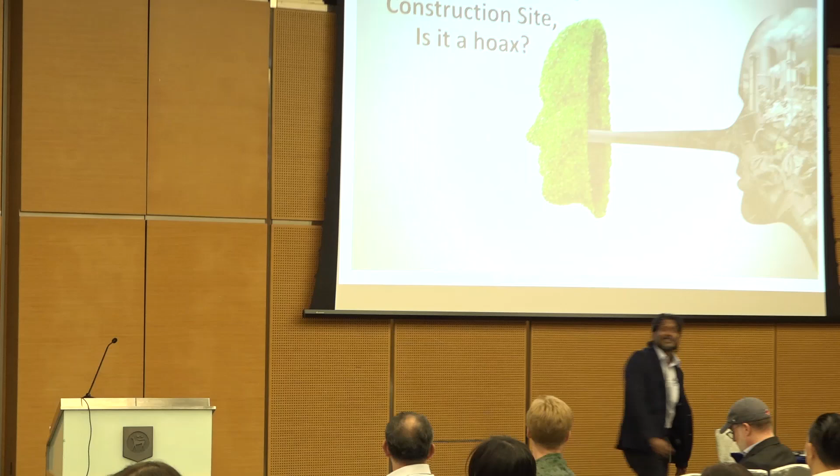Hang on, before that I need to have my clicker. What is the impact from the construction industry? Because when you understand the impact from the construction industry, then you will understand what kind of practices we can mitigate or do. I'm just going to run the whole thing, it's easier.

These are the impacts, and these slides I use whenever we do a presentation at Green RE when talking about sustainable construction. Why is there this impact? I want you to know - it's like consumption of natural resources. Many of you are from the construction industry, I believe, or property development. Regardless of that, even this building that you are here in, we are using natural resources. Doesn't matter, wood, metal, aggregates, whatever - we are all using it to build the space that we are occupying. Yes or no? You may not think so, but this is what we feel.

Next is environmental pollution. When we talk about environmental pollution, the construction industry is polluting. Terrible, right? We pollute the air, pollute the land, noise pollution, sound pollution, whatever you call it, all that we are doing. Thirdly is the impact of material extraction.

The effect on the landform, the effect on the landscape when you extract this material. Imagine that you are extracting aggregates from a mountain. Maybe probably that area was occupied by the Aborigines and Orang Asli. That's it, you've changed the landform. You may even change the ecology, the biodiversity of it.

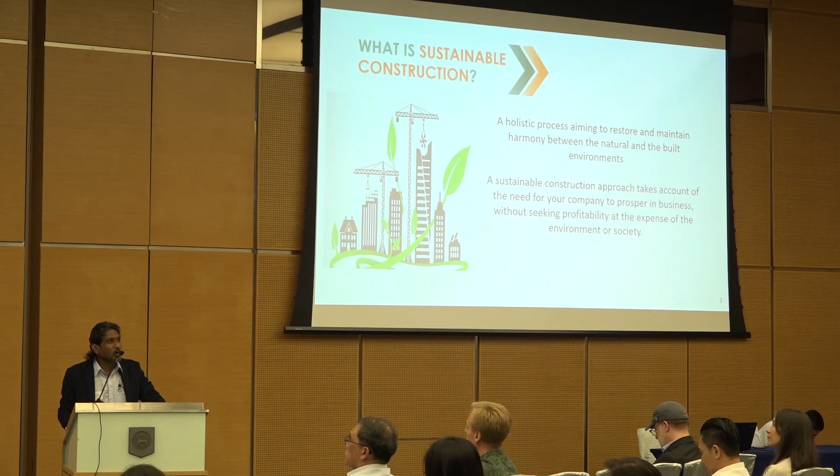But understanding impact, when you know your risk, when you know your impact, you know something's not right, what can we do? Hence comes sustainable construction. Sustainable construction, simply put, the primary goal is to understand what that impact is and how we're going to mitigate it, and to understand that the decisions we're making today have a long-term and short-term impact.

But whenever sustainability is mentioned, it cannot escape looking into three fundamental pillars. A lot of the time people look into just one pillar, but understanding the integration, the cohesiveness of these three pillars, must be made. So in the construction industry, we look into environmental, economical, and social impact. There are many things we can do to get it done.

I just touched on environmental - I spoke about pollution. What can we do? We can do so many things to mitigate it, from protecting biodiversity, having better waste minimization, water conservation, water protection, whatever you want to call it.

Then social. Social is mostly about the well-being of the people, the social well-being of the community, health and safety - they need to be ingrained, there needs to be cohesiveness in all that.

And next thing is, we are not doing this voluntarily, right? There is a profit involved, there's an element of profit, an element of making money. You need to make money, make money with this consciousness that we are also having some impact on this world, the earth that we are staying on.

So what are we going to do? Sustainable construction, whether it helps mitigate the impact, it all depends on us. So these are the few things you can do. From social, you can have local communities development. You can also look into your profit without harming the environment.

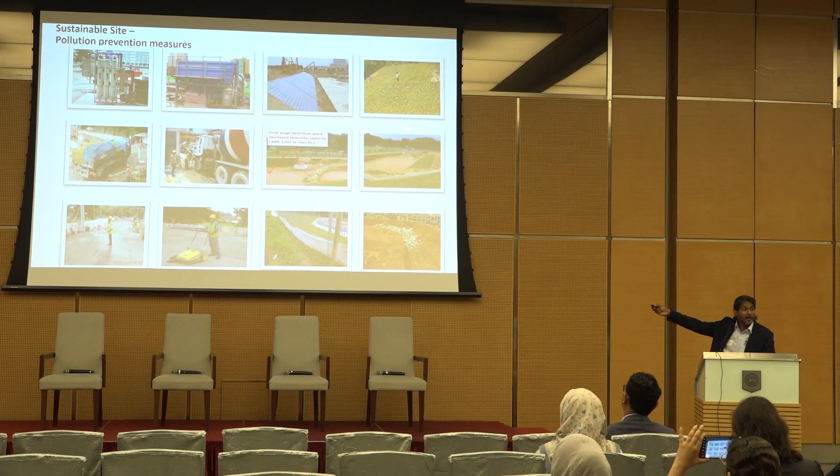It's not that we want to do an erosion and sediment control plan just to be the good guy - no, it's already in the requirement, it's already a regulatory requirement. We're supposed to have it, and we had it. We just made it better, that's all.

We made it effective - wash through, silt pond, silt fence. Some guys cleaning up all the dust and particles. It's partly a regulatory requirement that we comply with.

Apart from that, monitoring the energy use at your construction site - look at this site office. We have a long overhang, so there's less heat. Basically talking about OTTV, white colored, right? We have more natural light coming into our site office.

Better toilet facilities. I started 30 years ago - toilet facilities you can't even dream of, it was just across a drain. You used it before, is it? The toilet was just across the drain. Now we give better facilities to our workers.

We're having jaw crushers, regular maintenance of equipment for reducing emissions - not only emissions, the machines are more effective too. These are the green actions - using planter boxes in other areas to save water. All these few things can be done. This guy here, you don't idle - not only that, idling of machines and maintenance of machines. All these are the few green actions that can be done.

Okay, now I've shown you all that can be done, I've shown you the impact. This question still persists - is that a sustainable practice at our construction sites? Is it a hoax?

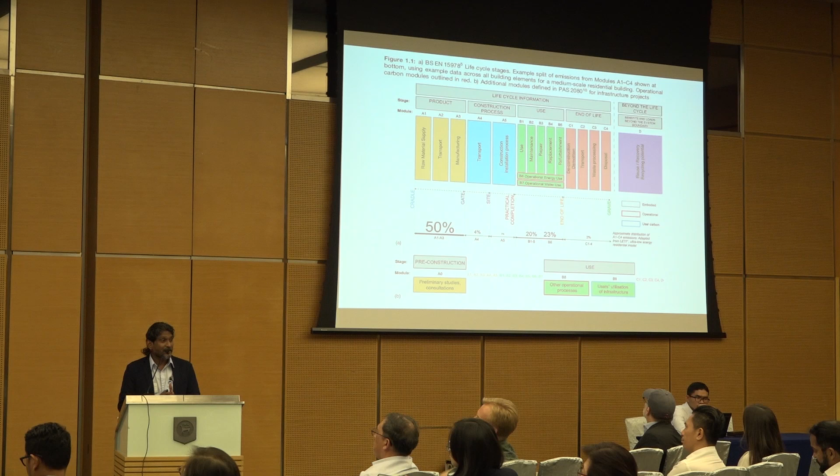Focus on specificity, transparency, and measurable data. Now you all have a detector. This is what I want to say about the end-to-end. So this is upfront - basically the product and the construction process. Then you have the use phase of the building, then end of life, and even then there is a benefit. So this is the direction it's moving - the life cycle emissions. You need to look into the whole thing end-to-end.

You become a hoax detector. Now you're going to be a hoax defender.

Compliance with requirement - as I mentioned, you don't need to do a lot of things, you just comply with requirement. We have sufficient regulations - EQA, DOE, CIDB, as I mentioned. The only thing we're lacking is enforcement. We record it, have best management practices.

Use specific language of what you're doing - state the target that you're going for. Back up claims with some third-party certification. Be honest about your journey. We know we are damaging the environment, we know about that, we're working on it. Make sure initiatives are supported by wider operational changes. I'm going to share some photos.

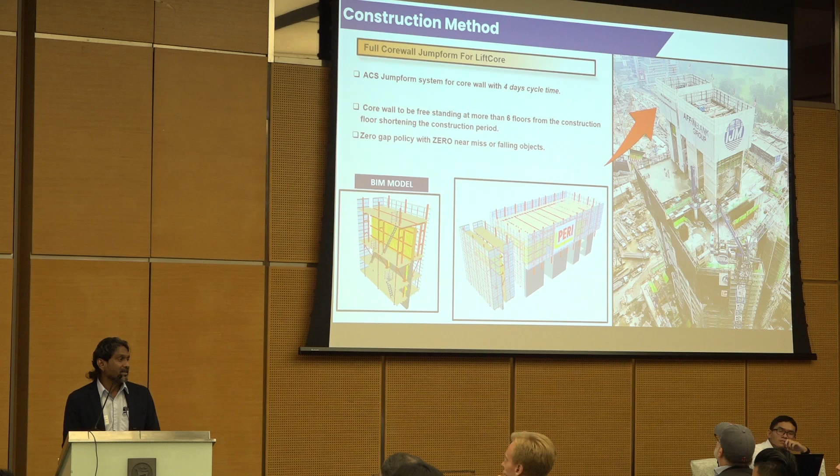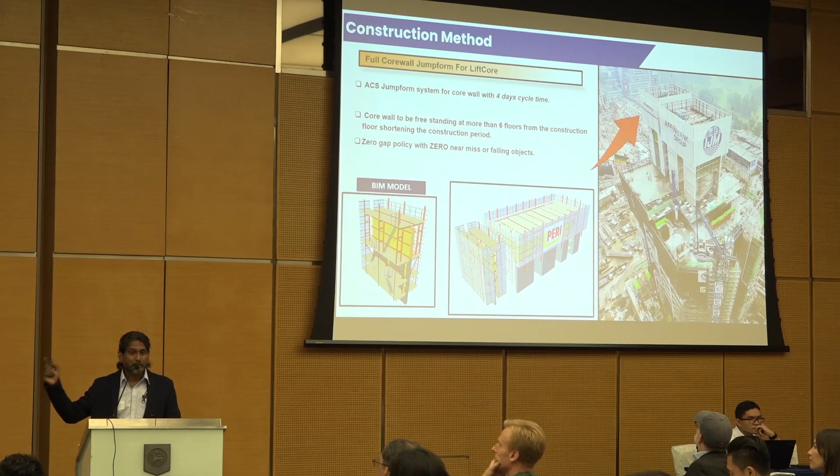Yeah, we can do all that and be a defender. This photo - when we did this project, the one thing we felt and learned was this: for a construction site to be really sustainable or green, every party needs to be involved. There must be integrated construction, integrated design, cohesiveness in that. This project is one of the success stories I like to share, because the client, the PMC, and the consultant all got involved, and we said let's look not only at environmental issues, but the well-being of the workers. They came up with a lot of things.

So we also proposed as a contractor, and the consultant came about and we did it. This project came with - I also have my BIM modelers at the back, we modeled it - an automatic climbing system that focuses on a zero gap policy. It's not only as a contractor, the client came, the designer came, and we could cast it easily, six stories high, six floors, faster construction, more efficient.

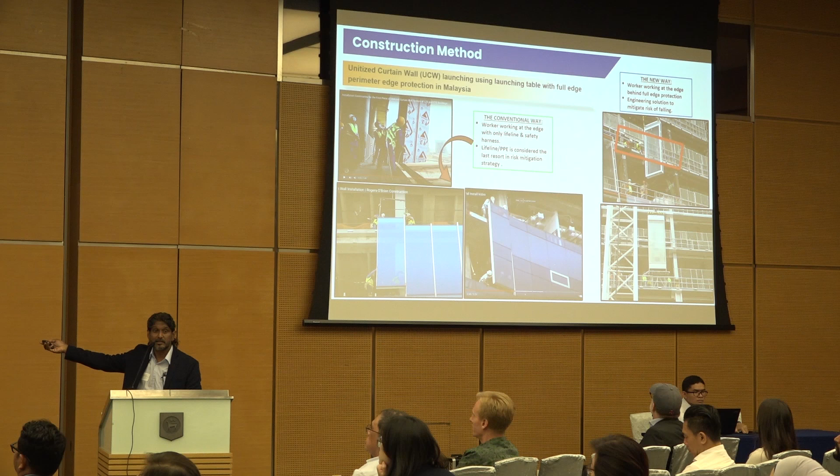This technology was from Australia. They brought it here and said let's do it in Malaysia. So we went in, for the well-being of the workers. Used to be they worked close to the edge, now it's behind the protection. We can still install the facade, no issue, and it's much better. Faster? Yes. For what reason? Sustainability. On what aspect? The social aspect, the well-being of our workers.

So these are a few things we explored. You see this guy? He's now behind the edge protection, meaning he's depending on two things - this lifeline and also this. His life is cared for purely because of sustainable practice.

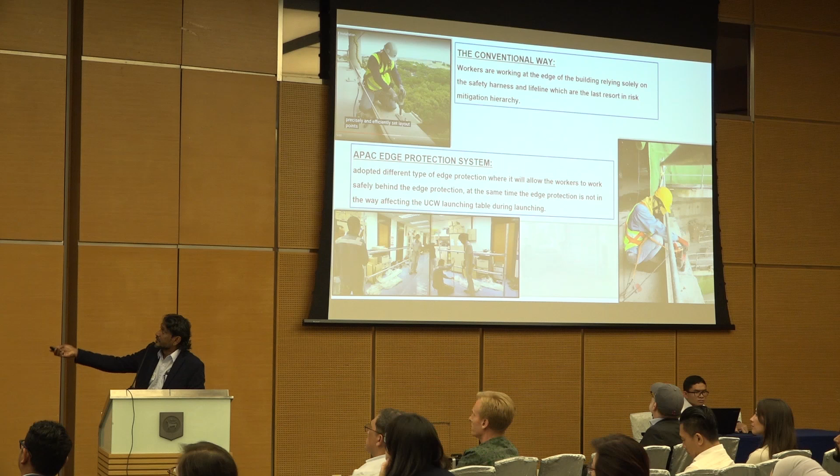Similar photo, best approach - we did some time saving, launched from inside. I can show you a lot of photos from our sustainable practices, I just picked one I felt was interesting to show you.

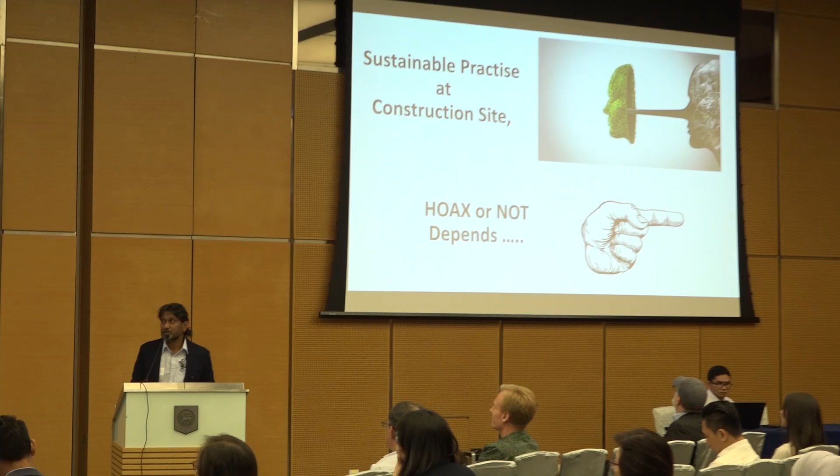I'm not focusing on environmental here, but on social aspects. Now, ladies and gentlemen, sustainable practice at a construction site - is it a hoax? Is it greenwashing? It purely depends on your action. Ask yourself that question. Work together with the whole team, have an integrated construction, integrated design. Thank you.

Okay, I think we'll move on now to Ibsen or Gregers? Gregers? Yeah. Okay, we can arm wrestle for it.

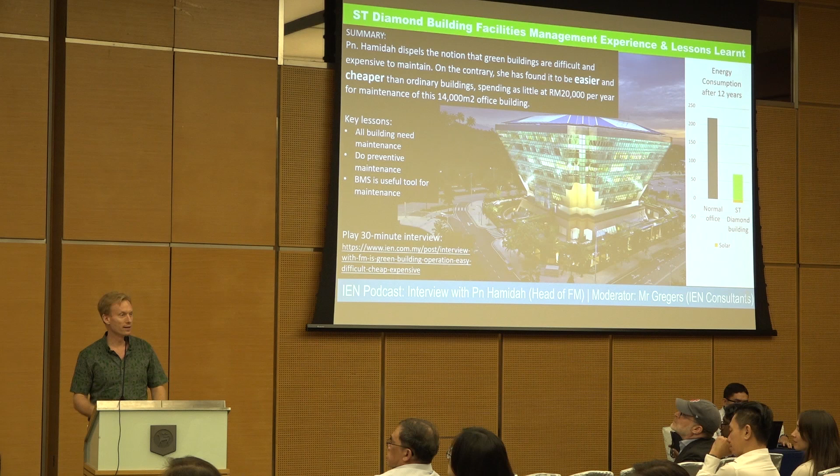For example, we designed for daylight, so very rarely did she have to change the electric light bulbs. We used variable speed drives for motors and fans, which means the equipment doesn't break down so easily because it's easier on the motors. So not only was it easier to operate than a normal building, it was also cheaper, putting to bed all these misconceptions. Listen to the interview for more highlights.

But of course we have to design correctly as well. So the other one I wanted to share is about new construction - this is an electronics factory in Penang.

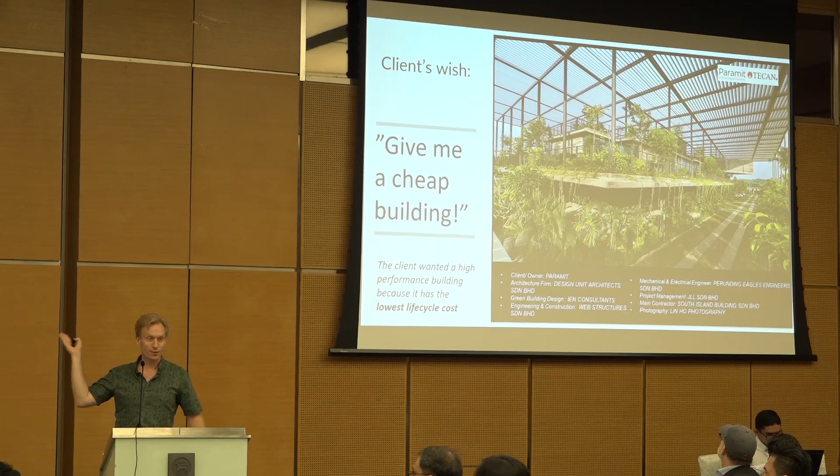What was interesting about this project was the client came to my office here in Bangsar and said, I need to get a cheap building, I want a cheap building. And that's what he got - that's what you are looking at. He's very happy with the building.

As you can see in the bottom left corner, the client in this case meant a cheap life cycle cost, because he knew he had to pay the energy bills. So he knew it had to be very energy efficient. And he knew it was important to have a building conducive to the staff working there, because with happy people you get higher productivity, less sickness, and so on.

But very few clients - I've only had one client like that with this kind of awareness, and that was this guy. I'll show a little bit from the factory. This is in Batu Kawan, near the second bridge in Penang, and a couple of the project highlights.

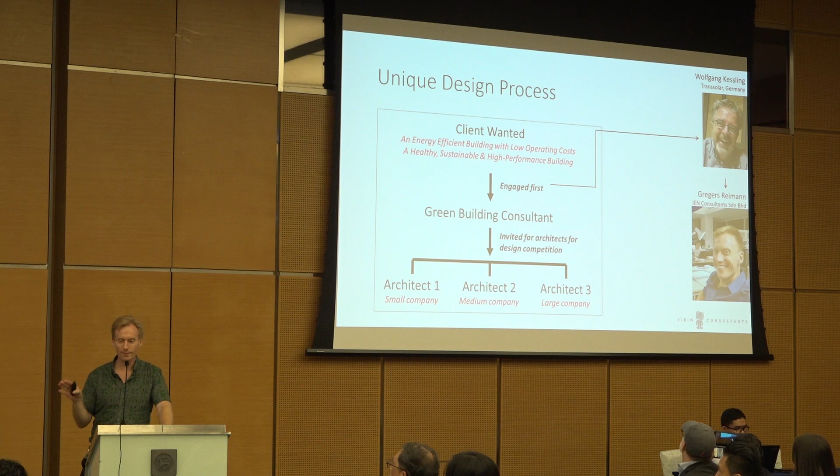One was how this project started, because the client wanted efficiency, so he actually looked for the engineers first - the energy efficiency consultant - not the architect. This guy from Transsolar in Germany was contacted first, and he basically said, why don't you call Gregers, he's in Malaysia. The client was very happy with what we did and said, great, you're on board, please recommend the architect.

So me, as an energy efficiency engineer, was actually the first person on board, and I was in the position to say this is the architect we should employ. I recommended three architects that we knew we could work with. One of them won, and the rest is history. So it was not that I was designing the building, but the whole design revolved around getting efficiency right, and the architect knew that as well, but had to consult with me.

The other highlight is, for example, on the cooling system. As is the case in many buildings, the engineers will take the drawings, make various assumptions, and come out with some kind of cooling system sizing. In this case, we did the detailed energy model, and we told the engineer that because we designed it to be so efficient, using passive design and so on, we could get away with a much smaller chiller plant.

So we compared notes. He agreed his calculation was a bit too simplified, and he basically said, okay, let's go with your chiller sizing. Just by doing this, we already saved the project 5 million ringgit straight off the bat, so my fees were paid back many times over.

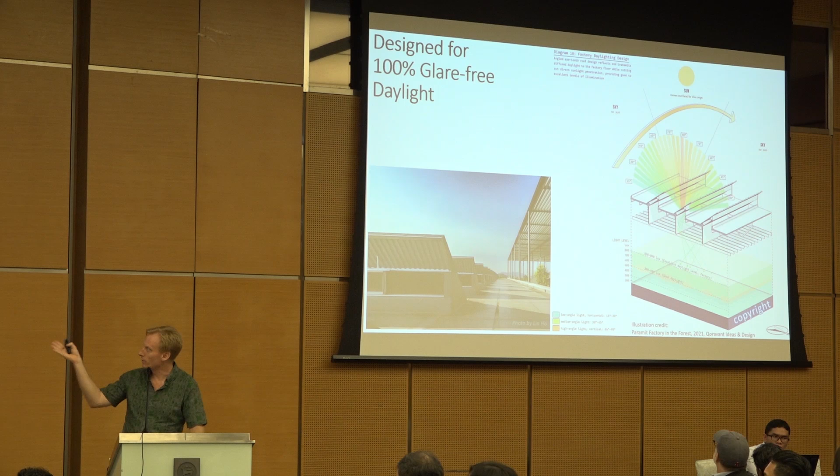So I won't go into all the details, but here's some of the passive design features, working with the climate, trying to keep direct sun out, letting diffuse daylight in, insulating where necessary, using plants. One thing, for example, is having skylights throughout the factory, and even when some direct light comes in, we had screens to deflect or diffuse the light.

So very even lighting. On the active side, we used something called DOAS and slab cooling. I'll show some slides.

And then, of course, we had to make sure we had the right insulation in the floor so we didn't lose the cooling through the ground.

So we tried to calculate the real payback time for a factory like this, because the client wanted a cheap building. So what is the ROI? Most people, when they come to the factory, are like, wow, this looks really expensive. They're very impressed. I even had a taxi driver think it was a resort or something. I said, no, it's an electronics factory. But...

Actually, this is the cheapest thing you can build if you look at the life cycle cost and factor in all the things. So what is the biggest operational cost? In offices, it's definitely salaries. For some factories, of course, they use a lot of energy as well.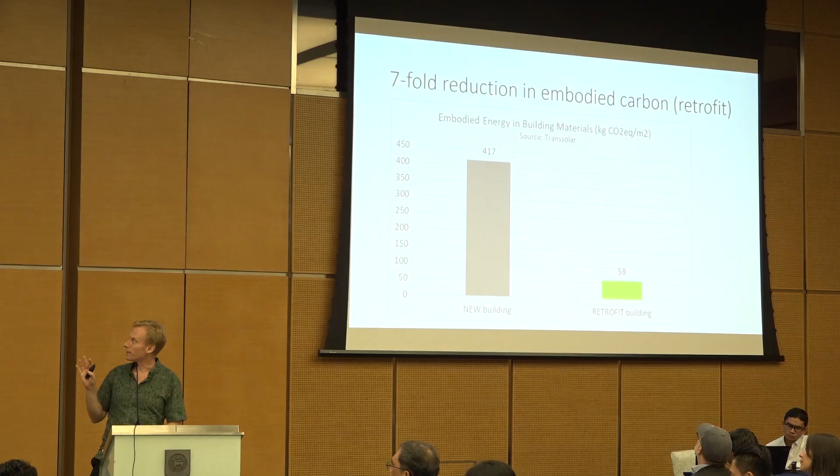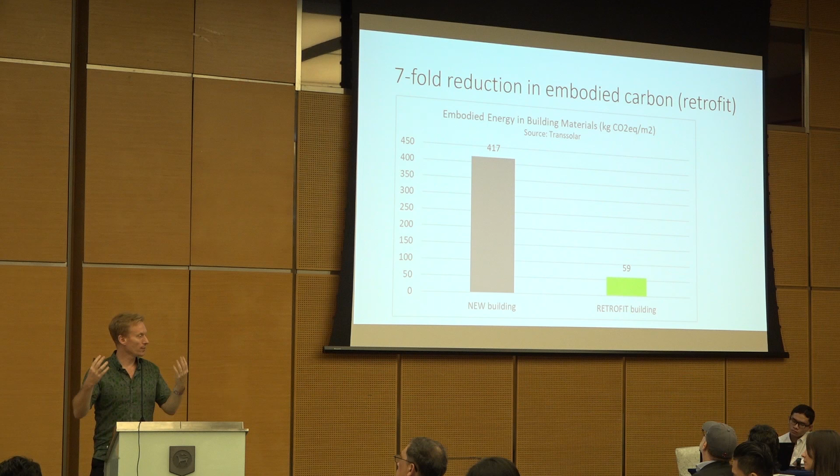If we look at the carbon balance from building a new school versus doing a retrofit like we did, we also have a very substantial carbon saving. So quite a good reference.

And then for the opening, we had the Deputy Prime Minister of Singapore, and he basically said this should serve as a good example for everyone to follow, for the nation and I guess beyond as well. Yeah, thank you very much.

Okay. The previous speaker is very tall, so I have to put it down.

Good afternoon, everybody. Thank you very much for your presentation. It brings me back as well—that was my school too, when I was taking my graduate certificate, and I was on that building. We cut all of the electric fans actually because it was really...

Okay, so Ramesh has given us a very wide overview of the whole operational and embodied carbon, the total life cycle of any construction industry. Gregor has already given us an overview in terms of the operational side of it. What I'll do is cover Carbon Cure, now on the embodied carbon part. So it just falls nicely into place.

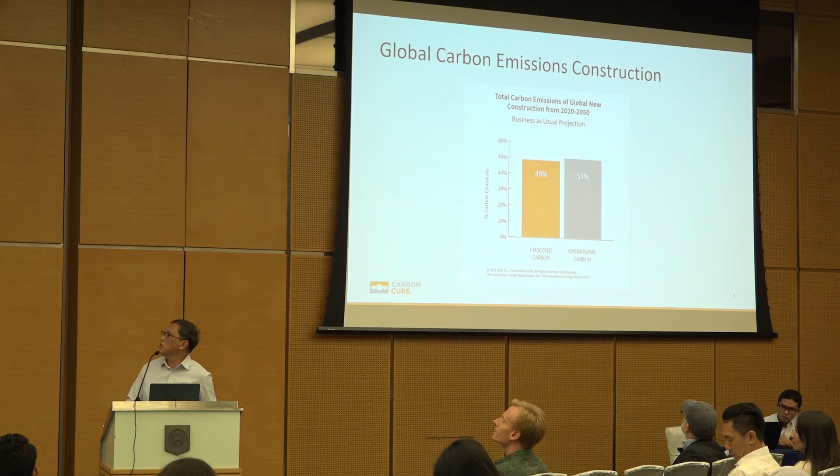I think everybody already knows what embodied carbon is. There are two types of carbon in a building: one is operational, and one is embodied. The embodied part is all of the materials put in and how much CO2 is used to make that material, to make the building. From what we understand, the operational side will be around 51% of the total CO2 in its life cycle, and the embodied carbon will be the other 49%.

So what we are seeing here is that by 2060, the building bank will double, and that is equivalent to about one New York or Manhattan city every month for the next 40 years.

So just imagine how much concrete is going to be used, how much materials are going to be used, whether it's steel, glass, just imagine.

So the next one is that because of this, designers, developers, architects are now, just like Gregor, trying to understand how to really lower it down. Now there's a race to it. So from 2020 to 2040, at least the initiative is to have zero embodied carbon emissions into that building.

I think everybody already knows this, that 8% of the total CO2 global emissions is coming from concrete. However, concrete in itself is just a legacy from what it is, which is cement. So most of it will be coming from cement. Probably everybody knows that cement is just a raw material for concrete. You have aggregates, sand, and water, and the biggest part of it is really coming from cement.

So later on, you will see an overview on how cement is being made and what the industry is doing about it as well.

So here's just a very simple overview of how CO2 is being moved from cement into concrete. From the raw material of calcium carbonate, which is limestone or marble, it's being heated up to about 900 to 1,000 degrees centigrade. It's a very energy-intensive industry, and then you break it down into lime and CO2. The lime is the one that goes out to make the cement and into the concrete, and the CO2 is where it's coming from.

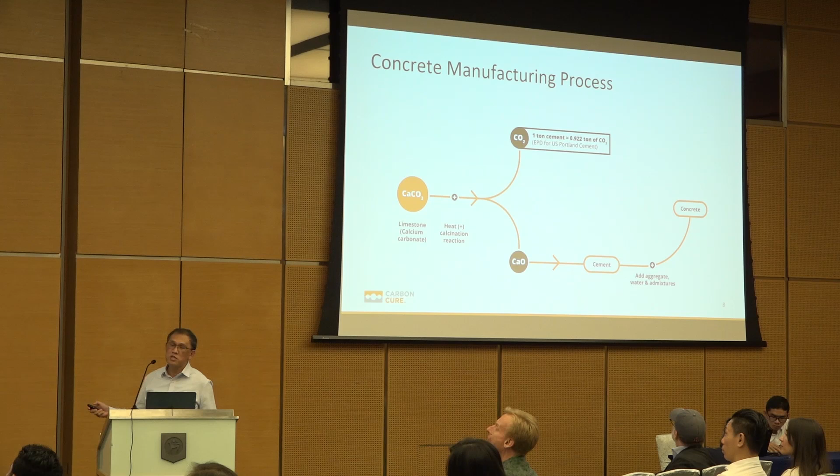So here it just says, from EPDs from US Portland cement, it's about 922 kg, or 0.922 tons of CO2 per ton of cement. So that is quite high.

So knowing where the CO2 is coming from concrete, now we have to go back down to the basics of raw materials and what makes concrete. So here are the sources of CO2 which is coming from the cement. I'm not so sure whether most of you will be familiar with this.

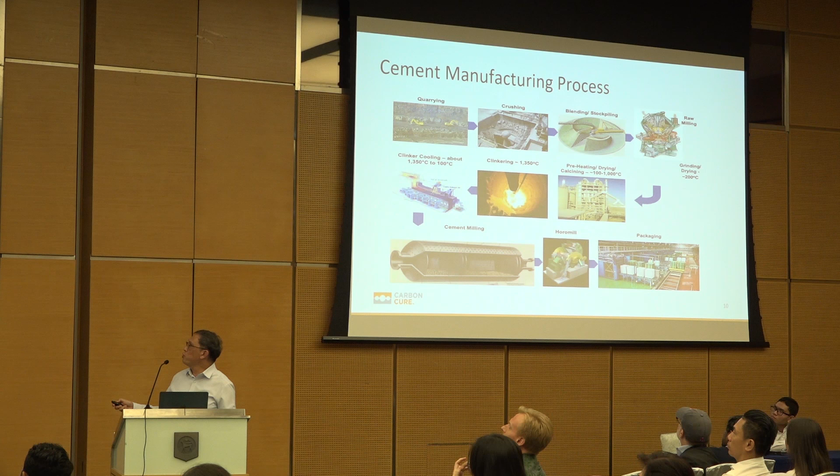This is how the cement is being produced. Mr. Ramesh already knows this very much. So it starts from quarrying, then you crush it, blend it together with some other materials, grind it, making stone into very fine powder. You preheat it to 1,000 degrees centigrade, and then you clinkerize it. Inside is about 1,300 degrees centigrade. And then you cool it down, you mill it, and then you pack it.

So very basic, but it's very energy intensive in terms of fuel and electricity. So just a snapshot of how it is being broken down into the sources of CO2 emissions in the cement.

So you have calcium carbonate here, calcination. Here's just where the CO2 is coming from. So that is about 502 kg per ton of cement.

And then you have another one, which is the combustion, the fuel that is being used here. If it is coal, it's higher. If it is natural gas, it will be lower. If it is an alternative fuel that is being used, it will be lower as well. But so far, this one is using coal, at 262 kg per metric ton of cement.

Of course, as I've mentioned, this involves grinding, moving a lot of big machineries. So power, say for example, here is using 100% coal, so that's about 72 kg. And then the minor ones are about 26, so all in all, you have 862 with this calculation, and it can range from 650, which is the most efficient, to the non-efficient right now at about 900 kg of CO2.

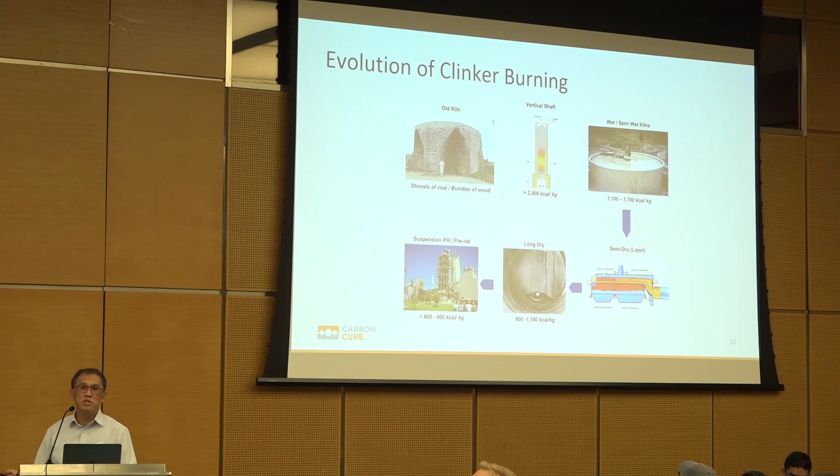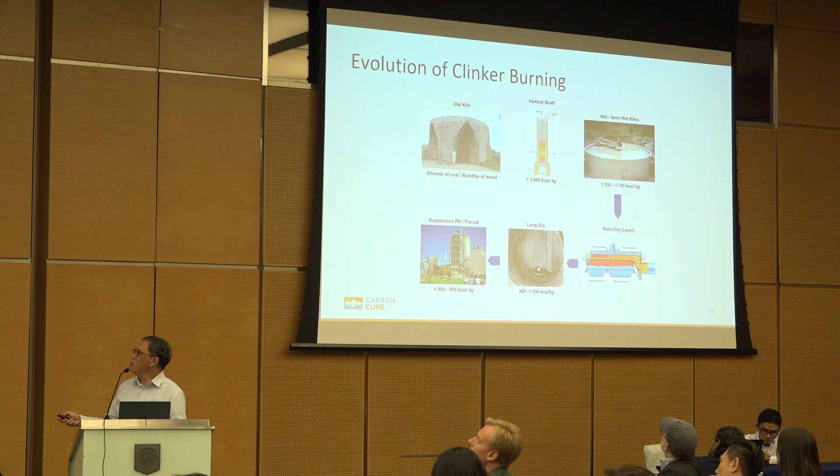Okay, what are the mitigating measures being done by the industry itself? Way back in the 1900s or even 1800s, that is how cement or clinker was being produced - just your typical oven or something. Then it started to become more modern but used about 2,000 kilocalories of fuel. Then it evolved into Lepol, suspension preheater, and as you can see, the energy is going down because it's getting more and more efficient. Whereas right now, as I've mentioned, it's about 862.

So you can see even the industry, beforehand in the 1800s and 1900s, was already being environment friendly, thinking about the environment. So from 2000 up to now, that's about 1,000 to 1,200 reduction in fuel in making cement, which is about 340 to 410 kilograms CO2 reduction.

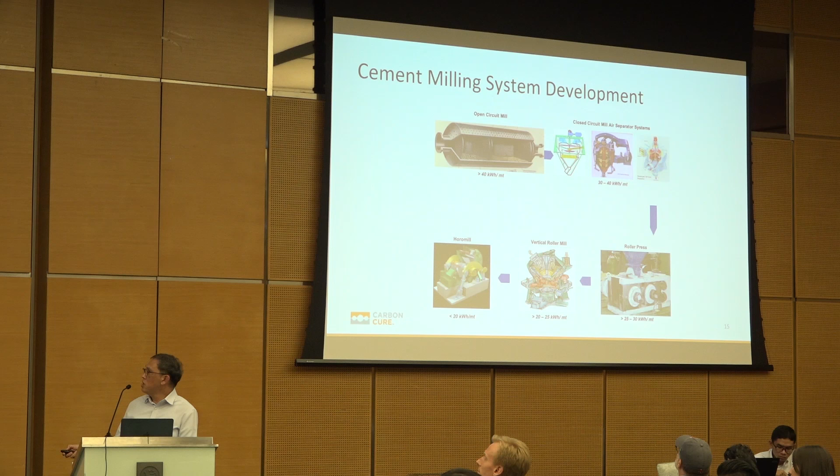Now in terms of power, it's very energy intensive because you have to grind it into very fine particles, into a level that is like the powder makeup used for the face - that's how fine it is. So from more than about 40 kilowatt hours per ton of cement, it's now down to about 20 kilowatt hours per ton. So again, from fuel, it's half, and from electricity, it's also half.

However, the other thing being done is the use of SCMs. So in terms of the clinker factor, or the substitution of other materials for cement, it actually went down from 0.9 to 0.81. Later on, you will see it's now about 0.71.

And then the other one is using slag and other materials. Actually, there are now tests using zero cement, 100% slag, and I know of a project that wants to build a house made up of 100% slag.

Of course, there's also LC3, limestone calcined clay cement. This one uses less energy - if we look at a while ago, it was about 800, this one uses only about 400 to 500 kilocalories per ton of cement. So this is another one, and it's nearing soon - in one of the countries here in ASEAN, we'll be putting up a plant soon.

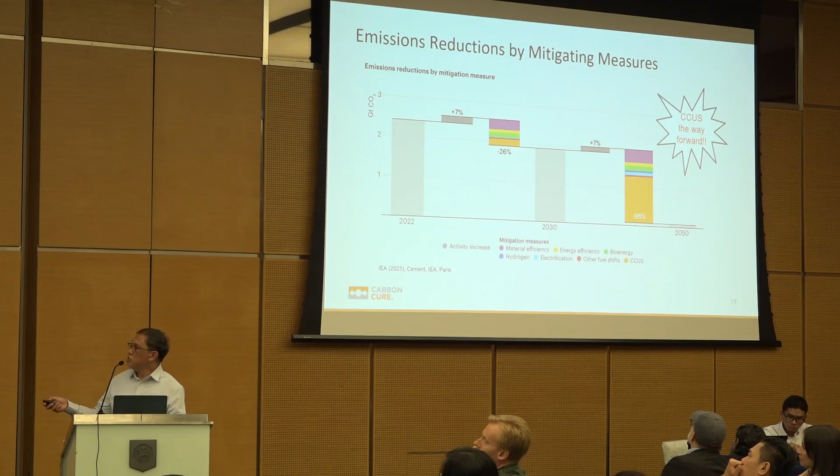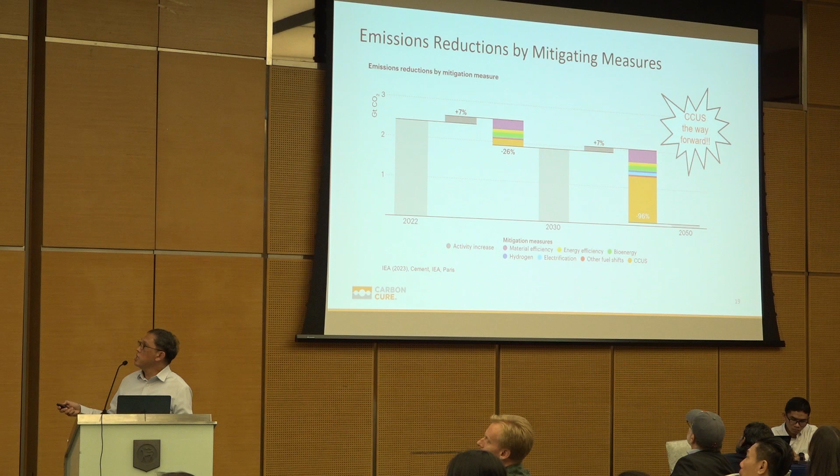Now, why do I put this all together? This is coming from the International Energy Agency website. As you can see here, these are the emissions coming from cement, projected to add about 7%, and here are the mitigating measures which will lower it down by 26%. The other mitigating measures are material efficiency, energy efficiency, bioenergy, hydrogen, and of course CCUS, which I think everybody is already familiar with.

CCUS stands for carbon capture, utilization, and storage. So with all of the pledges being put in under COP, from 2022 to 2050, it will reduce down to this level. What is very interesting here is that the biggest jump is really on the CCUS. There's already a lot of technologies going on out there in terms of how to do carbon capture, utilization, and storage - probably you've seen in commercials such as Exxon's carbon capture and storage.

So the next one is Cemex - all the cement plants are now capturing their CO2. And then we have here also Heidelberg. I think the best example is in Edmonton, Canada, where they have already put that in place to capture the carbon.

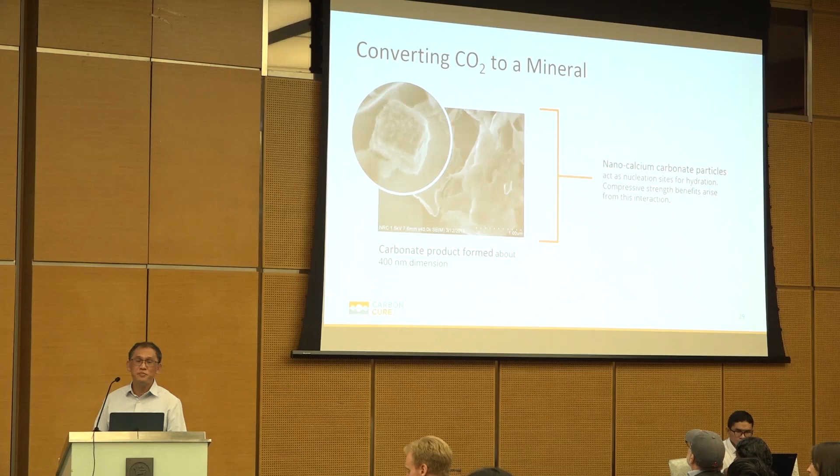This is just how it looks like. Probably I'll skip that.

Because it's a very novel technology, there are no standards on it right now. Actually, even though we're certified to ASTM C494 in the US, it's more of a certification for admixture - specifically admixture type S.

But one example is that in Singapore, government bodies are now not really mandating, but they have opened up a field wherein everybody can use carbon mineralized concrete. BCA, similar to CIDB here, has already put in that if you use this carbon mineralized concrete, you can get ticks for Green Mark. Land Transport Authority in Singapore has already specified carbon mineralized concrete into their low-grade concretes, and for high-grade concretes, you just have to prove it.

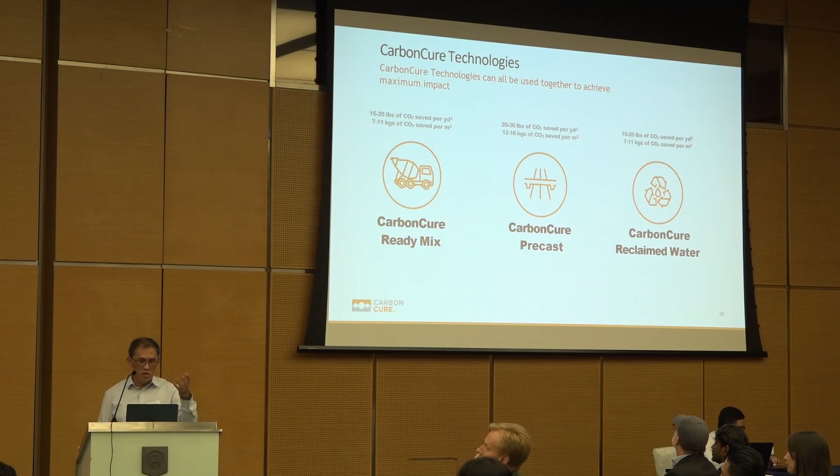So CarbonCure uses CO2 for ready mix, precast, and reclaimed water. In the concrete industry, you have sludge coming out from the washings. What we are doing here is putting in CO2 so that you can reclaim whatever cement is in that sludge. This is the reaction using the reclaimed water system.

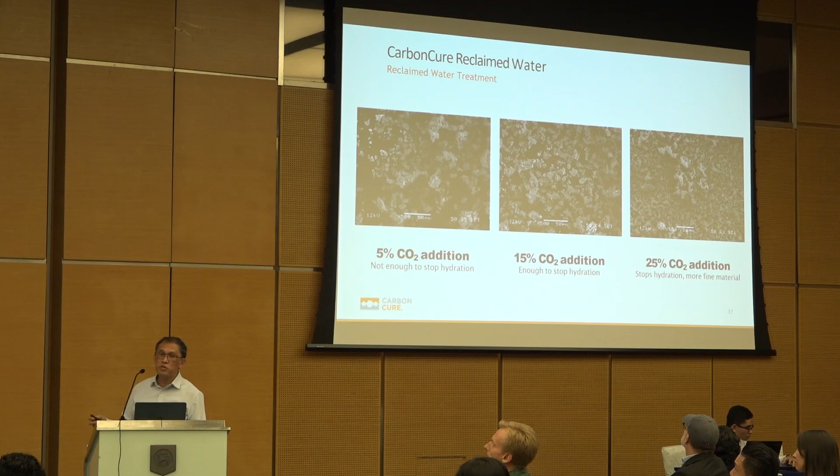This is how it is in terms of addition of CO2, 5% here and 25% there. As you can see, it's being enriched. That cement can still be reused back, and the clean water also reused back.

We are about 800 systems already worldwide. We have celebrated about - more than 43 million cubic meters of concrete that is being done with CarbonCure. That's about 800 systems worldwide, comprising different industries - precast, ready mix, and different types of cements as well.

Here are some of the CarbonCure project examples. I think one of the best ones will be the Arlington, Virginia Amazon HQ2. Closer to home is Singapore, the ExxonMobil gasification plant, and some other examples in Singapore - Tuas Port, JTC Semicon Space, and Avenue South Residence by UOL.

I was trying to end it with a video, but I think we're already out of time. So what I'm just saying is that before sinking it somewhere, probably use it - CarbonCure it.